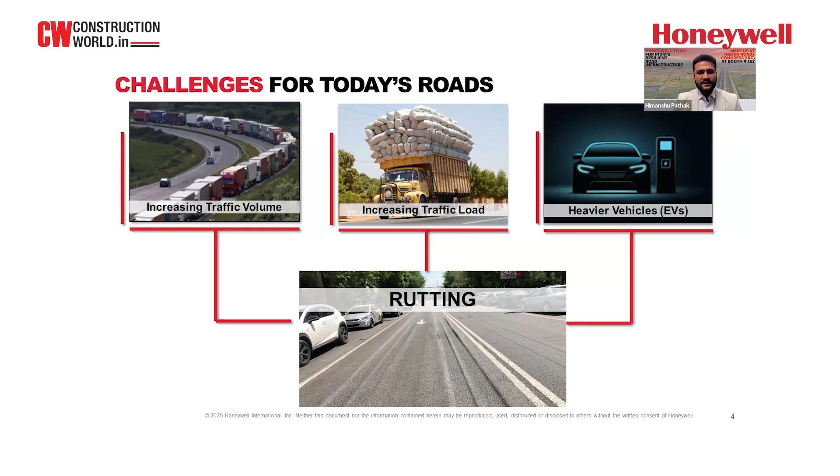Challenges also vary by region - in North India, especially Northwest, we have extreme summer in Rajasthan and parts of Haryana, Punjab, Delhi, so higher temperatures, even some parts of Maharashtra. There are areas with harsh winter and snowfall, particularly north and northeast, and areas with the highest rainfall. We cannot have one single recipe that suits everyone, whether it's about material, additive, or the kind of design we do. There's good experience present among our co-panelists, and I'm sure they'll touch on these topics.

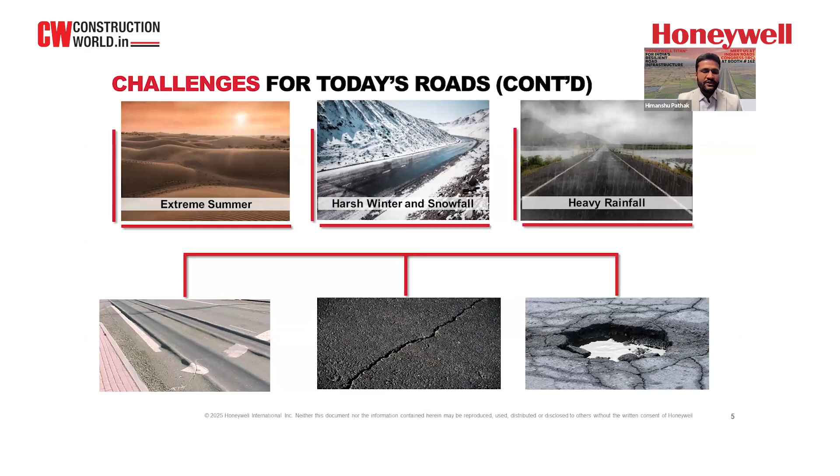We need to address the symptoms and find the root cause of these problems, then do the diagnosis and address them. During our presentation we'll cover various topics and shed some light on these issues, leaving you with thoughts to collaborate and discuss on ways to reduce moisture damage, rutting, and similar issues going forward.

As I mentioned, around world-class roads, the second part was on sustainability. Decarbonization is no longer a buzzword or a green story people want to drive - it's the reality. We need materials with more energy conservation, greener materials, and practices that are less carbon intensive. That will drive innovations in the paving area. Combining these challenges, can we have a material that is low carbon, works across all these climatic challenges, has a lower carbon footprint in production, and can solve some of these problems? That's the topic we'll discuss throughout today's presentation.

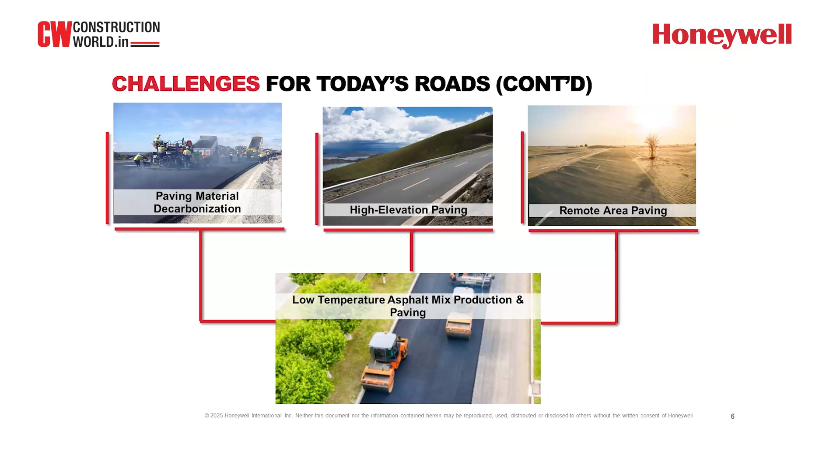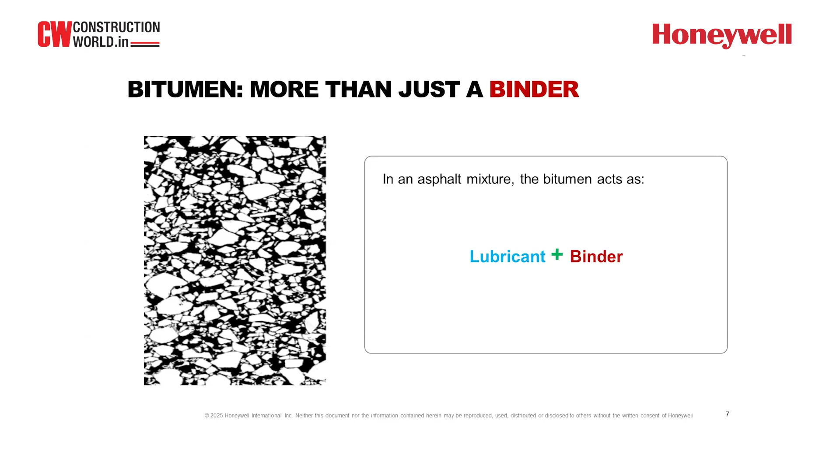In the next couple of slides we will show you why we say this. This slide shows how bitumen acts as both a lubricant and a binder.

Then a compactor comes in to compact the asphalt mix to a certain thickness, density, or air void content. For most of the production process, the transportation process, and the majority of the compaction process, bitumen behaves like a lubricant. It coats the surface of the aggregate to make the flow and movement of the aggregate easier so they don't stick together, and also reduces friction. Even during compaction, we want low friction among the aggregate, so when you compact it, the particles can move around each other easily, making it easier to achieve the target density or air voids.

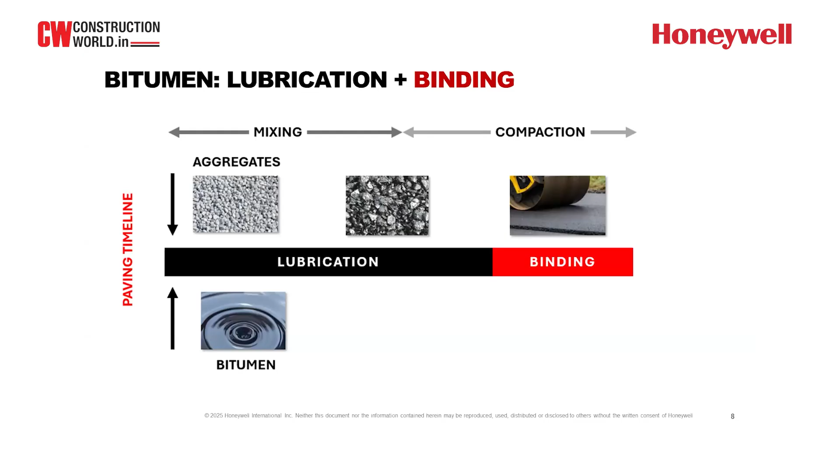In order to meet those challenges Himanshu just discussed in the last couple of slides, polymer has been widely used globally to modify bitumen, producing PMB, polymer-modified bitumen, to meet those challenges. We've had fairly good success modifying bitumen into PMB and using PMB to build roads. The natural question to ask is, there are so many different polymers in the market—which one should I pick? Or put another way, what is the ideal polymer for bitumen modification?

In our opinion, the ideal polymer used to modify bitumen should not only increase bitumen's stiffness, PG grade, viscosity, or modulus at high temperature—warm climate temperature—because it gives better rutting resistance, but it should also improve bitumen's lubricity, since we just discussed that bitumen acts as both a lubricant and a binder. We need the lubricity from the polymer.

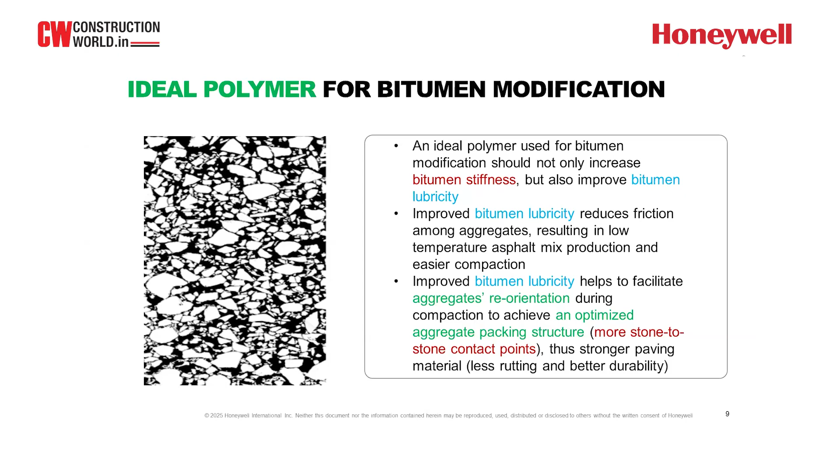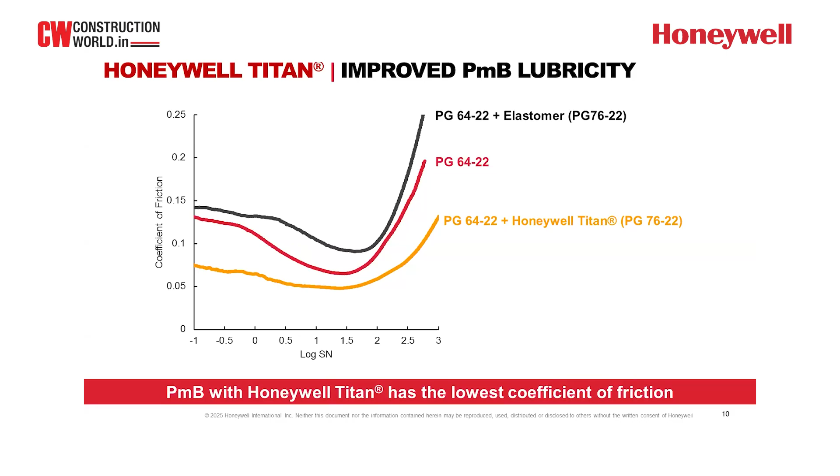Go to next slide, please. Yeah, one more click. Okay.

So with the improved lubricity from Honeywell Titan in the PMB, what we found is this better lubricity will help to optimize the hot mix asphalt aggregate structure. To the left, these are two high resolution digital camera images we took of core samples compacted in our lab. We use a diamond saw to vertically cut the core sample into small pieces, around maybe 1 centimeter in thickness.

Then, you can see here, the white colored areas, those are aggregate, right? With different sizes, you have larger aggregate and smaller aggregate. The black colored areas are either bitumen or PMB or air voids. So we use the high resolution digital camera first to take the digital picture, then we use the software called IPAS2 to count the stone-to-stone or rock-to-rock contact points in a certain cross-section area.

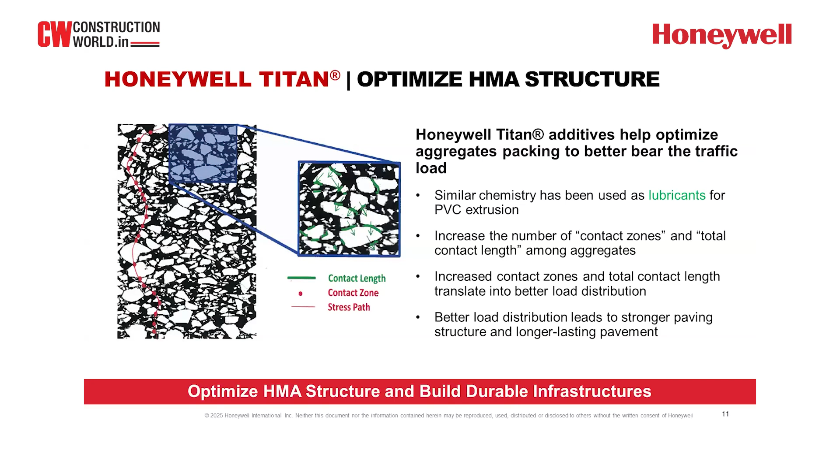So just a couple words. Similar chemistry made by Honeywell, similar to Honeywell Titan, has been used as a lubricant for PVC extrusion to reduce friction, right? So by nature, this polymer can help to reduce friction.

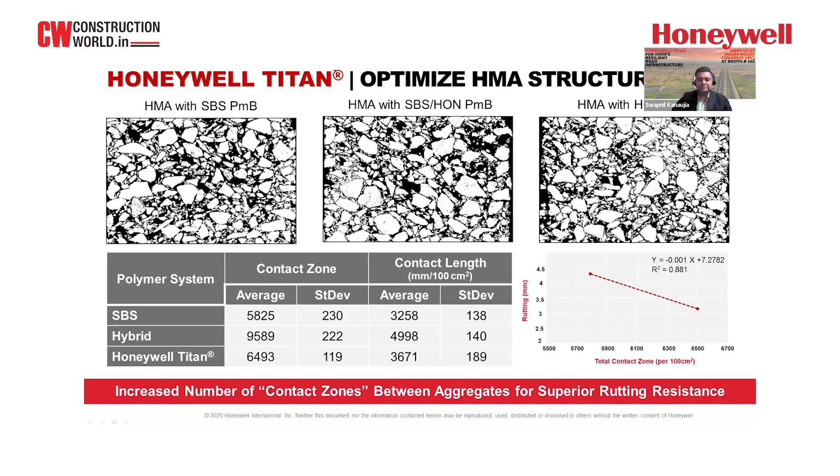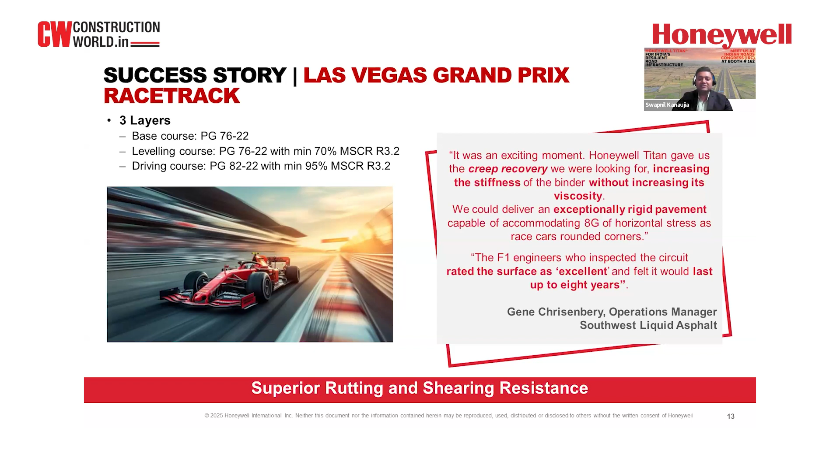So here the problem statement was to lay the track with higher PMB grades, due to which the viscosity was shooting up on the higher side, and the customer was also failing to meet the creep recovery as per the standards. So the approach the team followed was that we did some in-house lab work, which resulted in an optimized dosage of hybrid formulation, which helped to achieve the required specs while keeping the viscosity in limits, which further helped in the ease of paving and enhanced the workability at the site. So can you move to the next slide?

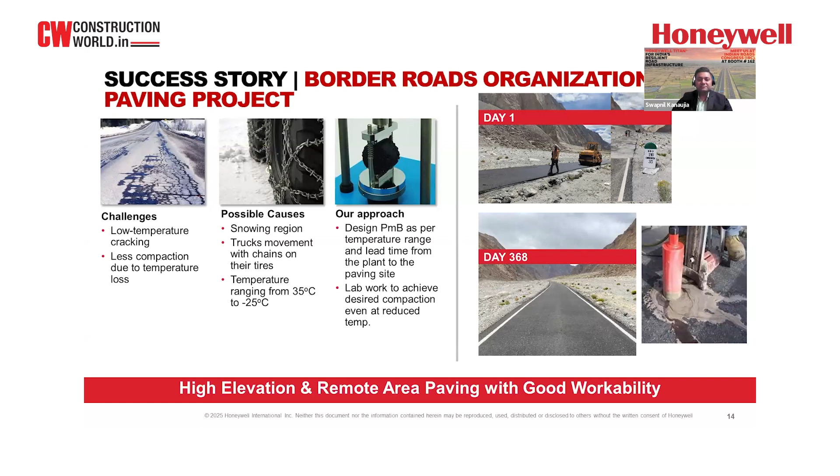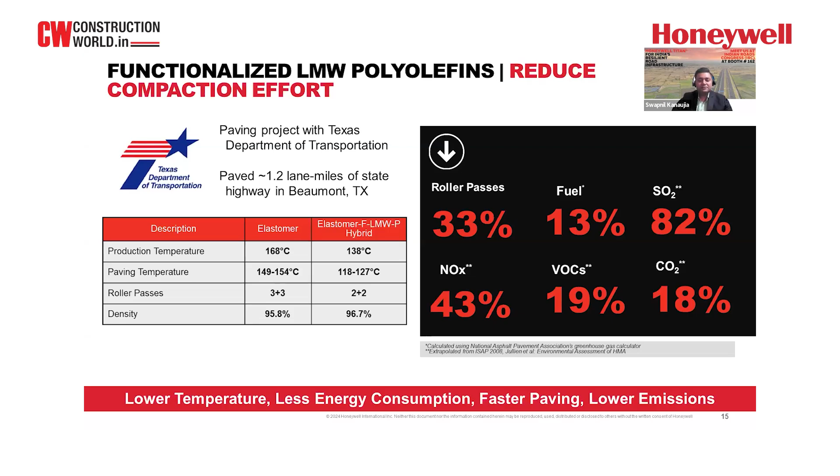Yeah. So at last, I just want to conclude, and maybe Yong Hong and Himanshu can pitch in where needed. So the conclusion from the whole slide states that bitumen not only acts as a binder, but it also acts as a lubricant. So bitumen can be taken both as a lubricant and as a binder. And how Honeywell Titan helps to overcome some of the problem statements is that it increases the bitumen lubricity.

It helps to increase the lubricity, which results in optimized aggregate packing, which connects to building stronger and durable roads. And if you can do the operations at lower temperatures, that will obviously help to reduce the environmental emissions. So anything, Yong Hong and Himanshu, if you want to add in this? No, I think we are good.

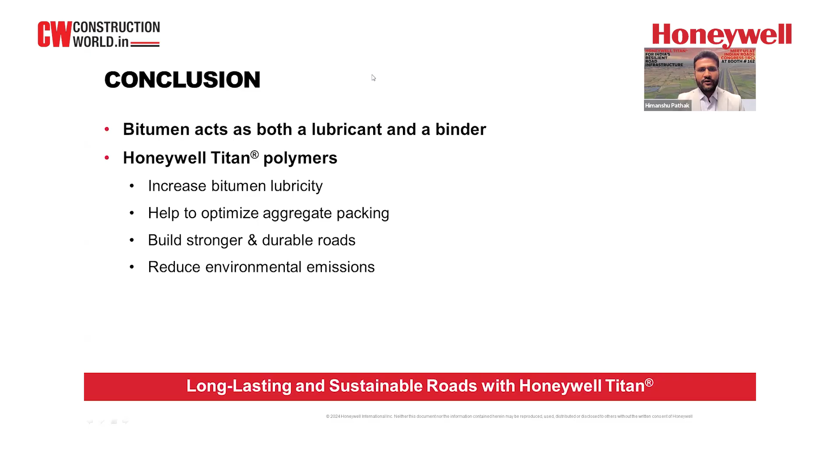Yeah. So thank you very much to the Honeywell team for that wonderful and insightful presentation. It was a great introduction to the cutting edge technologies and applications that are paving the way for a more sustainable future. So now moving on to the core of today's webinar, our panel discussion.

I am truly honored to introduce our esteemed panelists who bring a wealth of expertise and experience to the table. We have Mr. Biswabikash Raut, senior manager at L&T Construction. We have Dr. Rajiv Kumar, scientist, Flexible Pavement Division, CSIR, Central Road Research Institute. We have Mr. Muthu Annamalai, Vice President Projects at Vertis Infrastructure Trust, and Mr. Himanshu Pathak himself, Project Manager at Honeywell. This session will be moderated by Mr. Vijay Agarwal, Managing Director at Equirus Capital, who will guide us through this important conversation. Over to you, Mr. Agarwal.

Yeah, thank you, Karthik, and thanks everyone for joining this session. It is a very important topic of pavement. All of us are riding our vehicles on the road, and we are always worried about the quality of roads. I'll try to dwell upon a few burning issues in the sector. So I can directly come to Muthu first.